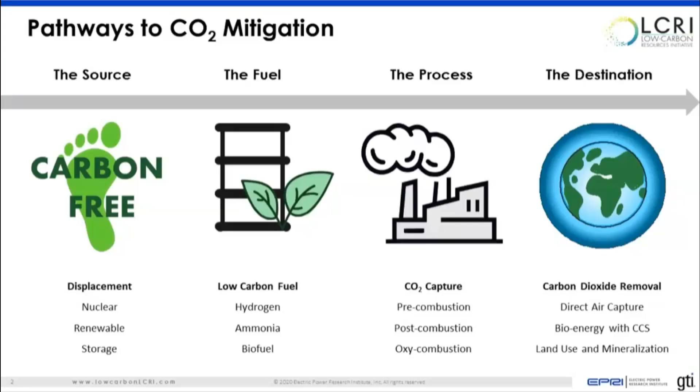So when it comes to decarbonization, we can recognize there are many pathways and potential ways to get there. Everything from the source being carbon-free itself, the primary energy perspective, all the way through removing CO2 from the air as those that are already accumulating, or as we continue to accumulate CO2 emissions through ongoing production of electricity and other activities. And then, of course, everywhere in between, looking at the fuel and looking at ways that we can integrate new processes. I'm going to focus mostly on the fuel aspects and their relevance to both the source and some of the opportunities we might find in deploying carbon dioxide removal technologies.

So when we think about the way of the future of decarbonization for the electric grid, we certainly recognize at EPRI that there is a strong need and a push to continue producing low carbon power generation. So we will continue to rely on a strong nuclear fleet with license extensions and development of new reactor technologies. We will continue to rely on solar and wind assets to produce electricity with battery storage and also energy efficiency standards being applied, and also looking at ways to directly electrify portions of our economy to enable greater and more widespread decarbonization. We're also considering, and there's a lot of research ongoing at EPRI, focused on carbon capture aspects from our fossil-based assets, especially as they help transition into a more decarbonized future.

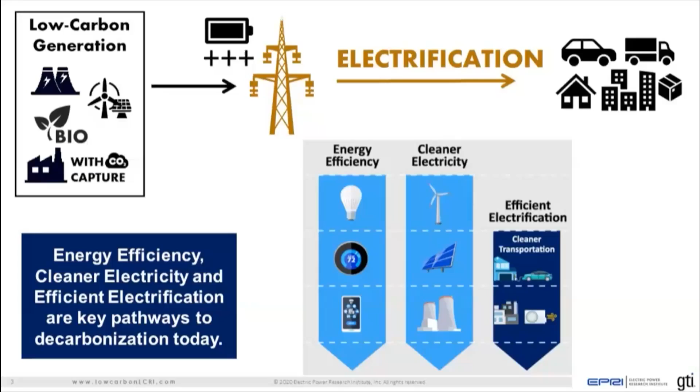So with all of these areas, energy efficiency, cleaner electricity, and efficient electrification, we recognize that we can get to nearly full decarbonization, but it's really considering how do we get that last 10, 20%. And it's not only how do we decarbonize the electricity sector, but we also have to consider other parts of the energy economy that will be challenging to decarbonize.

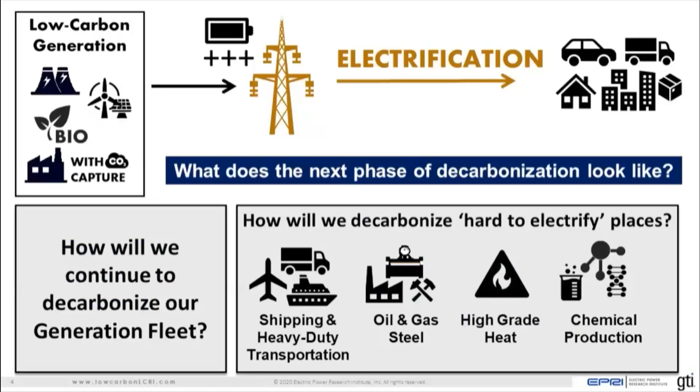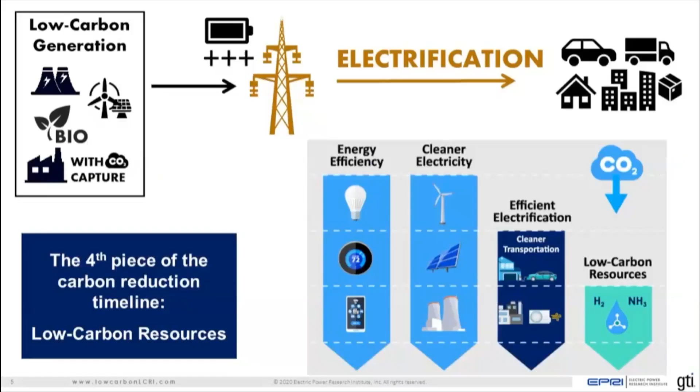And so there we're looking at core aspects of integration, so looking at systems level analysis that help us tie into where the electricity sector is going and where it could contribute to decarbonization through various pathways beyond direct electrification to enable CO2 emissions reduction now and into mid-century. And that fourth piece of the puzzle and the area that we are focused on, we call low carbon resources. So essentially this is that last 10 to 20% of the power generation grid, but then also it spans into the energy economy as a whole.

And then in the 100% cap case, we're showing that the electric sector CO2 emissions are reduced relative to 2005 levels. So what we can find is that there's a lot of assumptions that go into this, and with the shorter duration of this talk, I can't get into all of the details, but there is an EPRI report, of course, for reference. But what we find is that there is, without carbon dioxide removal technologies, a need and a role for hydrogen and probably other low carbon resources in achieving final emissions reduction from the electric system.

Hydrogen production for the electric sector use in this case would be a power to gas to power cycle. And we see that it actually increases based on various policies, especially those that become more restrictive for decarbonization. But we also have to caveat that there are other aspects at play, other technologies which, based on the long horizon, 30 years is quite a long time, a lot can happen between now and then, that we can see technologies such as batteries becoming more of a breakthrough and then would alter some of these scenarios.

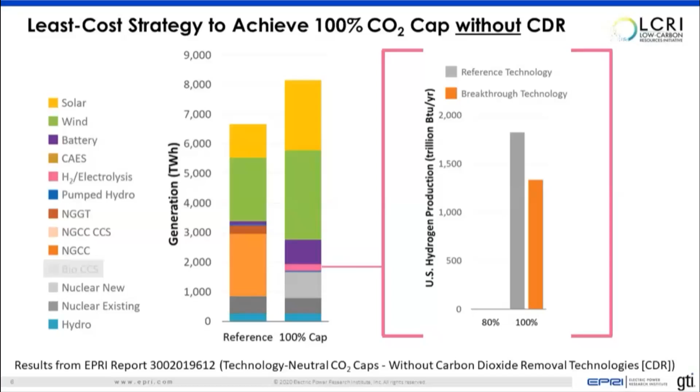So what is the value, what is the purpose of CDR? If we look at pathways that could help achieve the limitations established under 2 degrees C targets, what we find is that there are a number of pathways that get us to global net CO2 emissions relevant to that 2 degrees C target. So here on the graph, we're showing net emissions and establishing a curve, which is essentially the curve we are currently on in the trajectory.

And we've run a number of analyses based on various scenarios. And in some cases, we can find that if we were to curtail emissions directly, this is global across the board, more than just electric power generation in the U.S., so this is the entire economy, we start to see that there is a potential to achieve net zero at a cost, of course, and this is making broad technology assumptions, but there's a pathway to do so.

There's also a pathway that if we continue on the track that we're on, to continue emitting CO2, and then again, the end goal being to limit to the 2 degrees C scenario, then we have to, in that case, begin to bring the curve down. And the way to bring the curve down is essentially to deploy carbon dioxide removal technologies that physically remove CO2 and store it. And in this case, we're looking primarily at bioenergy carbon capture systems, direct air capture, and other similar technologies.

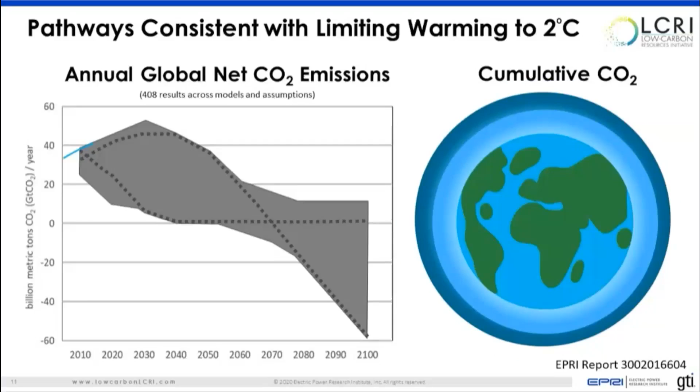So then this paints a picture of an envelope. And of course, within this envelope, there's a myriad of other cases and assumptions. Here we're showing essentially a summary of 408 different model outputs. So the situation obviously isn't very clear, but it helps give us some perspective with which to analyze the situation.

So let's go back and let's look at the same scenario. In this case, we have the 100% cap on CO2, but we incorporate carbon dioxide removal technologies. The graph on the left shows the same figure that was shown before. It's looking at generation with no CDR. On the right, what we see is that we have capacity, and we're showing capacity here mainly for interest in this talk because we looked at generation and our model assumptions.

There is an uptake in generation from a hydrogen perspective, but it's really where capacity for hydrogen stands out the most in terms of differentiating. So the capacity story is just a little bit more interesting. So the graph on the right, 100% CO2 cap scenario, showing both bioenergy with carbon capture and storage and direct air capture, that's the all category, direct air capture only, so no BECCS, and then on the far right of that, no CDR at all.

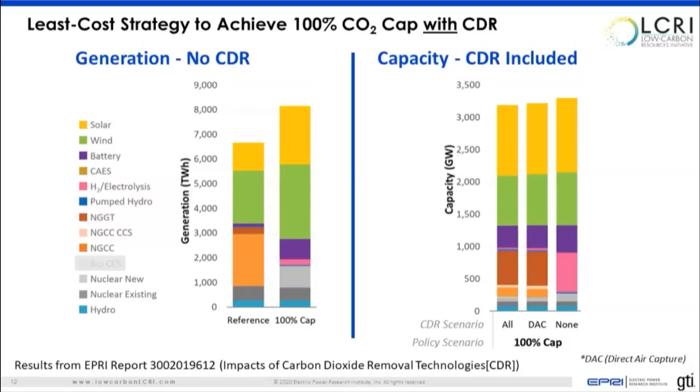And so what we see is that the potential role for hydrogen grows and becomes even more important as we consider removing those final emissions from the system. So that's the electric sector.

And what's really interesting and what we're finding valuable in the context of achieving decarbonization for the electric power industry and for the grid is really that there are other aspects of the economy, other users of energy, other suppliers of energy, such as the natural gas sector, also making very substantial commitments to various CO2 emissions targets by mid-century. And so we're seeing that as primary energy providers and energy suppliers to various end customers and consumers of energy, there also are interconnects that need to be made.

And so if we look beyond the potential for electrification, our estimates are somewhere between 40 and 60% of final energy demand will not be serviced by electrification, or will be hard to decarbonize and hard to electrify or expensive. And so then we have to consider other energy resources, and that's where low carbon fuels and low carbon energy carriers become important. And really it's these interconnections and the potential to integrate around these technologies and these systems which become critical.

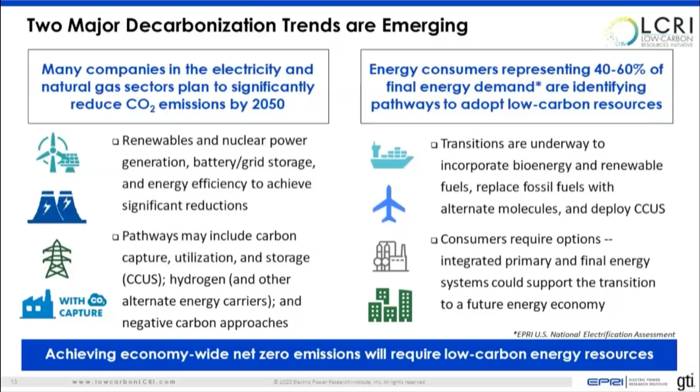And so if we think about from a macro level perspective, where we are moving towards today versus various scenarios which could occur out through 2050. In this scenario, we're calling it transformational. It's essentially showing that there's a 30 to 50% growth in energy due to direct electrification.

And then we're showing the opportunity where there are existing energy consumers in a 2050 scenario, which could be served by low carbon resources. And so we see that there is an important balance to both the final energy side, but then also understanding from a primary energy perspective, where we will achieve decarbonization across that spectrum.

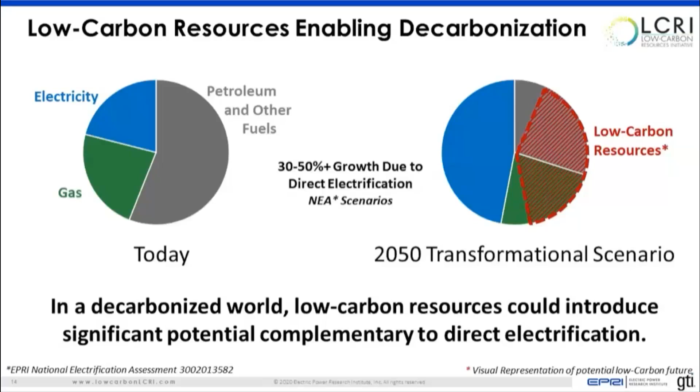And how important it is, when we think about the electricity grid and the role that electricity will play in decarbonization, how the infrastructure, how the support could also enable decarbonization across the economy. And so to do that, we're working on evaluating ways that we can continue syncing and connecting the electricity generation and the energy use, both from a consumption standpoint, but also from an energy production standpoint.

And that's where we're integrating more research and more opportunities to identify ways that we can deploy hydrogen and bioenergy, upgrade and deploy new infrastructure to support these low carbon resources, and then also find new ways to share the value of these resources across the economy.

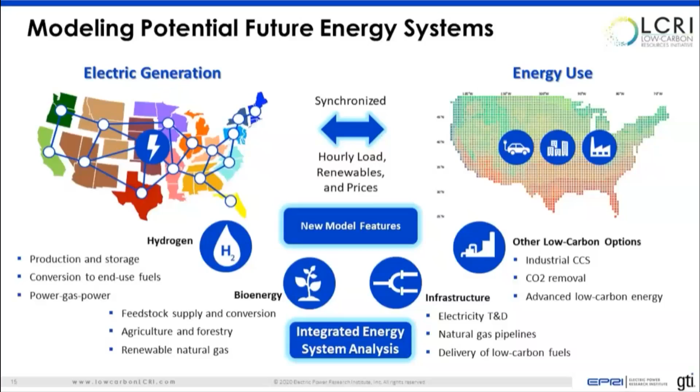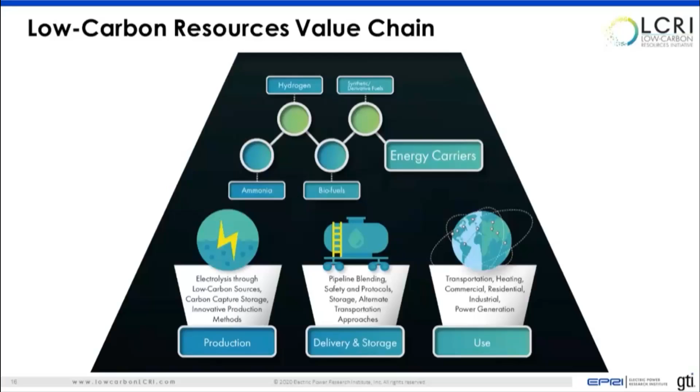So our focus through the Low Carbon Resources Initiative is around the entire value chain for these energy carriers. The next two panelists will be speaking on some very specific aspects of these value chains, but essentially it's how are we going to move, and how are we going to use these low carbon resources, and where do we deploy them in a way that achieves affordable, reliable, resilient, low carbon energy for the future across the economy.

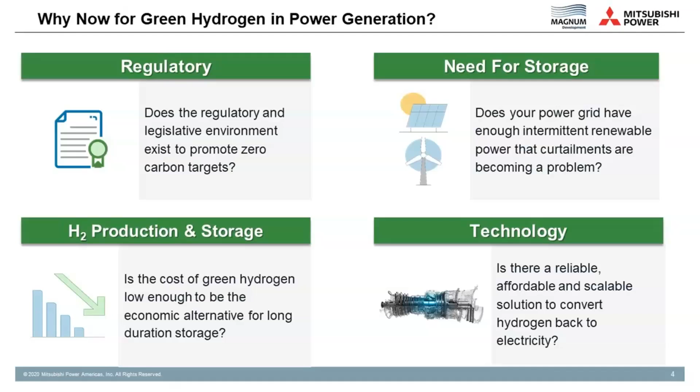And so what we're running into is the more renewables we're adding is actually now just creating more and more curtailments. And so how do you balance that so that I'm not having, really, solar competing against solar? You want solar balanced out over the course of a day and not have it just displacing other solar as we add more to the grid. That's a challenge that's facing us right now.

And so I was long on energy, yet in August of this year, we had our first rolling blackouts in over 2 decades. So what if I could have stored that excess renewable energy in, say, April and brought it into August when we unfortunately were hitting shortages of energy, and could that have otherwise prevented blackouts from occurring? And again, this is just at 30% today.

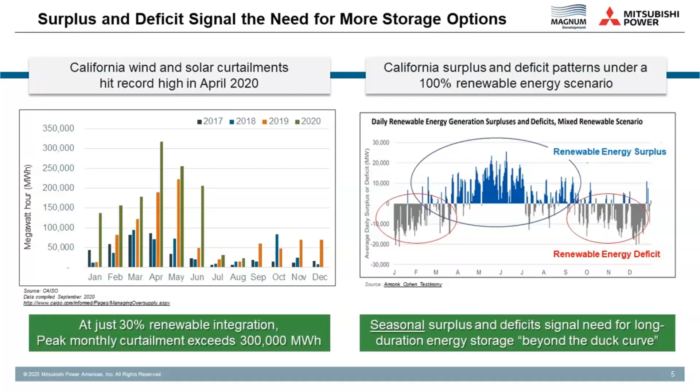That's really what we're trying to solve now, and this is where hydrogen can play a very important role in that regard. So, a lot of people don't think of hydrogen as an energy storage resource, but that is what it is in the power industry. And when we look at green hydrogen, that derived by renewable energy, it's no different than a battery.

And when we look at lithium-ion batteries, you've got a means to control the charging rate of excess renewables to a form of storable energy, we store that in lithium-ion batteries, and then ultimately when the power is needed, we're converting that stored energy to usable electrical via an inverter, in this case, converting DC to AC. A hydrogen energy storage system is exactly the same type of ecosystem.

You've got an electrolyzer technology that really controls your charging rate of excess renewables, converting it to a form of storable energy. We then need a medium to store that energy, and that can be in salt caverns, it can even be in pipelines or above ground pressure vessels. And then when we need that energy, how do you convert that stored chemical energy back to usable electrical? Well, that's where systems like a hydrogen-enabled gas turbine or fuel cells can present that opportunity. So again, no different here than a battery.

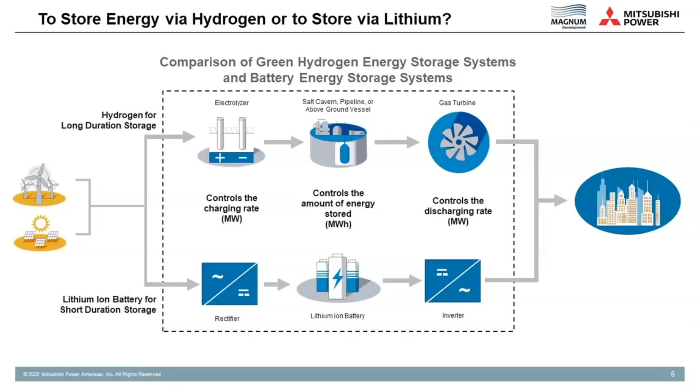And at the end of the day, hydrogen is really much better suited for long-duration energy storage and complements lithium-ion batteries, which are much better geared for short duration. Which gets to the next slide of a study we recently commissioned with E3 Consulting, and they looked at what are the opportunities for hydrogen in a low-carbon future in the West.

And really, the two most important things we were able to draw from the study from E3 was, like I just started talking about before, lithium-ion batteries are really ideal for your short duration, 4-hour, 6-hour, maybe up to 8-hour type of discharges, whereas hydrogen is going to be ideal for your much longer durations, getting into the 12, 14 plus hours, and as we add more and more renewables, we're seeing the need for those longer duration types of challenges.

And so, again, going back to the slide in California, if I want to shift April excess into August shortage, well, lithium-ion batteries are not well suited to be able to store that because they've got auxiliary loads to keep the systems energized. They have, even, self-discharge. Whereas hydrogen, you're effectively bottling it up, and whenever you need it, and given the vast uses for it, it's not facing the same type of round-trip efficiency impacts over that longer-term types of use.

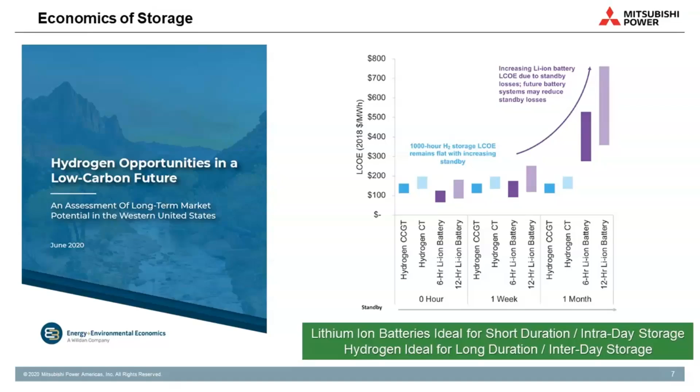So again, we're not here, though, to try to pit that it's batteries versus hydrogen, quite different. They're really solving two different use cases, and both use cases are absolutely paramount if we're going to reliably and affordably try to integrate more and more renewables and help meet our decarbonization goals.

So that really draws to the last signpost I talked about: what are the ways we're doing today to really cost effectively convert hydrogen back to usable electricity? And the Intermountain Power Project is really the world's first project geared at doing just that. So just this past year, we were awarded by the Intermountain Power Agency for our hydrogen-capable gas turbines. This power plant is actually an existing coal-fired power plant that will be retired and decommissioned by 2025.

And in 2025, we will have gas turbine combined cycles that will be operating initially on a blend of 30% green hydrogen, 70% natural gas. And by 2045, we'll be 100% green hydrogen combined cycle operation.

And then the last one, and I'll probably stop here on this slide, I wanted to talk about is our Advanced Clean Energy Storage Project, which is actually just adjacent to the Intermountain Power Project. But here, this is our project where we partner with Magnum Development, seeking to really create a hydrogen hub in Delta, Utah, to support the West's effort to decarbonize.

And this site here, one of our salt caverns, can store upwards of 150,000 megawatt hours worth of renewable energy. And that's really what we see as the great opportunity here in the West to help achieve, again, its larger scale efforts to decarbonize.

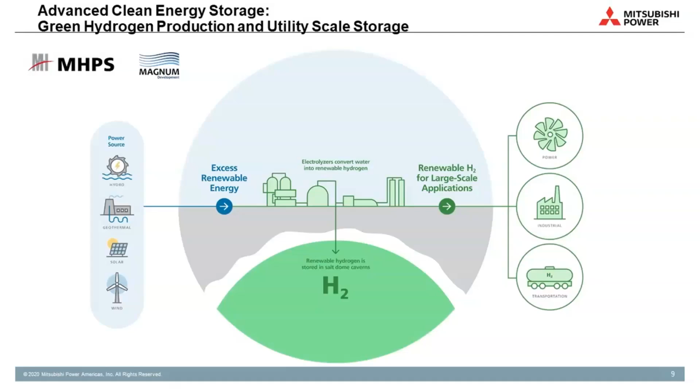So as Eric said at the beginning, my name is Sikander Mahmood, and I am the project manager in the Future of Gas team within Cadent. So just to give you an overview of the presentation today: I'll quickly run through the strategy of the gas industry in the UK and how that links into the projects, which I want to go into a bit deeper, which is HyDeploy, looking at blending hydrogen in the natural gas system, and how that fits into the wider picture of a project which we're badging HyNet, and then hopefully take some questions at the end.

Yeah, as Eric stated at the start of the conference, Cadent is the largest gas distribution network in the UK. We have over 80,000 miles of pipeline, and we also run the dedicated emergency gas line for all the UK distribution networks.

So to achieve the target of net zero by 2050, there's a lot of work to do, and the gas industry in the UK has already made some significant strides towards this via the use of biomethane and projects such as BioSNG, which look at converting black bag waste into gas. And then there's the hydrogen blending work that's going on across the world, and that's what I really want to focus on today.

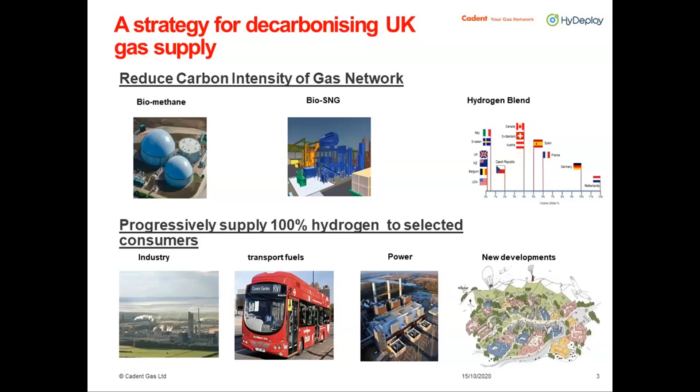And blending hydrogen is there to lead us to progressively start to supply closer to 100% hydrogen to selected consumers, such as heavy industry users, transport fuels, power generation, and new developments.

So what is HyDeploy? It's a project which is funded by the Innovation Programme in the UK. It's led by Cadent as the lead gas distribution network, and we're partnered with Northern Gas Networks, who are the other GDN. We're also working with Keele University, who are the host site, the Health and Safety Executive Science Division, who are providing us with the evidence that we need to go forward, ITM Power, who provide us with the electrolyzer, and Progressive Energy, who are covering the overall project management.

So the objective of HyDeploy is to essentially demonstrate that we can blend up to 20% volume of hydrogen within the current gas infrastructure that we have in the UK, and that it can be distributed safely and efficiently with minimal disruption to consumers. And there's a chance to have a saving of around 120 million tonnes of CO2 cumulatively by 2050.

And why blend and not jump straight to 100%? Blending allows us to start to hit that decarbonisation milestone with minimal change to the consumers. So the consumers would not need to change the appliances in their homes. The assets that we have in the networks can remain the same, and so there would be minimal disruption. And we can start to really build on that hydrogen supply chain whilst we work towards progressively supplying 100% hydrogen.

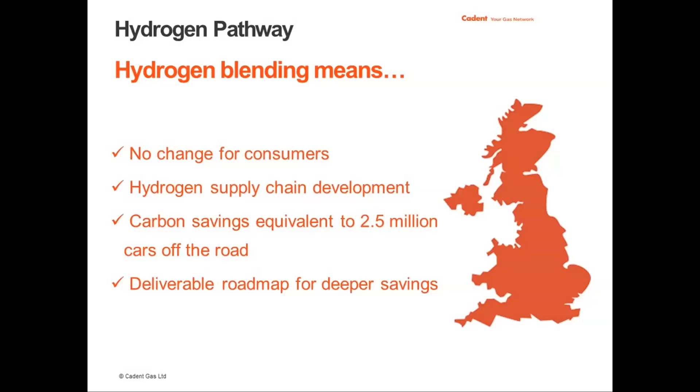And it really gives us a chance to reduce the carbon emissions in the meantime, and it's a great stepping stone. And we've used this figure here: it's like taking around 2.5 million cars off the road if we were to blend across the UK.

So just to give you an idea of the project timeline itself, we started working on the safety case for the first demonstration project at Keele University in 2017. We are still blending at Keele University. Due to COVID-19, we had a short break. However, we have extended the demonstration, which we hope to finalise in March 2021.

And in the meantime, we've been developing the evidence for the safety case for the second public demonstration of hydrogen blending, which will be in the northeast of England in a village called Winlaton. And we're hoping in the next few months we should be on site and ready to blend. And once that's up and running, we will start to develop the safety case for the final demonstration, which is part of the HyDeploy 2 programme, which will be a public demonstration in the northwest of England, and that will hopefully eventually lead us to roll out hydrogen blending across the UK.

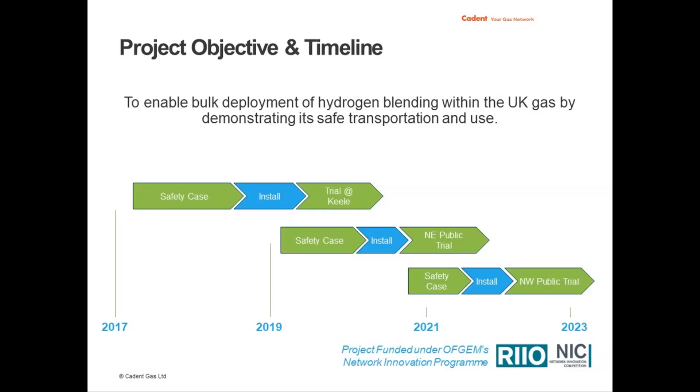So Keele University is a perfect location to have a first-of-its-kind trial. It's really like a small town on gas. There's around 100 residential properties that we're testing on, a few multi-residential buildings and some office blocks and commercial buildings. And it's been really good to work with Keele because, in essence, you're working with a private gas distribution network and having to deal with one party rather than multiple parties. And really, it's like a living laboratory.

So I spoke about the safety case, but what does building the safety case actually mean? There's a lot of work that goes into gathering the evidence. The current UK Gas Safety Management Regulations state that you can only have 0.1% hydrogen in the gas networks. So to be able to blend into these trial areas, we need to achieve an exemption to those GSMR regulations, which will allow us to have up to 20%. And to do that, we need to build a safety case of evidence.

So we've been conducting some research on the appliances that we have on the networks, the boilers, the gas fires, etc., and doing laboratory tests on blended gas and natural gas. The same goes for the materials that we have on the Keele network and the northeast, reviewing those pipelines and the assets that we're going to put the blend through, and doing some tests in the laboratories.

We're also looking at the gas characteristics. So how does gas accumulate in a building, and how does that differ for blended gas? And what are the consequences of that if it was to ignite? And then there's the operational side, so looking at the gas detection equipment that we use currently, and how will that work with blended gas, and also the operational procedures that we have for emergency response. And then finally, and quite importantly, is the customer perception piece.

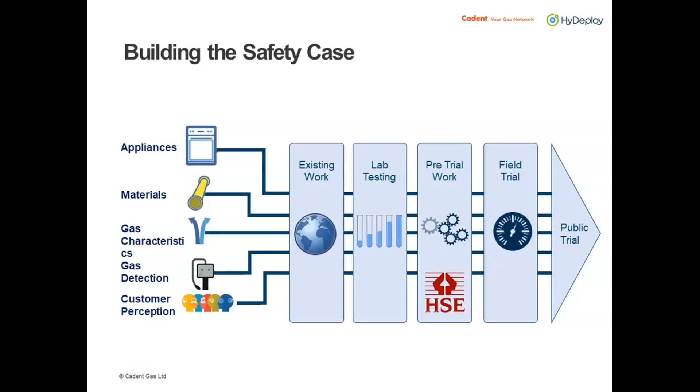So HyDeploy is the first time we've had blended gas in a network in the UK, so we've been able to gather some real evidence on the customer perception side, working closely with the customers at Keele and in the Northeast. And all that leads us to gathering that pre-trial work evidence to achieve that exemption. So following an exemption, we then start the installation phase on site.

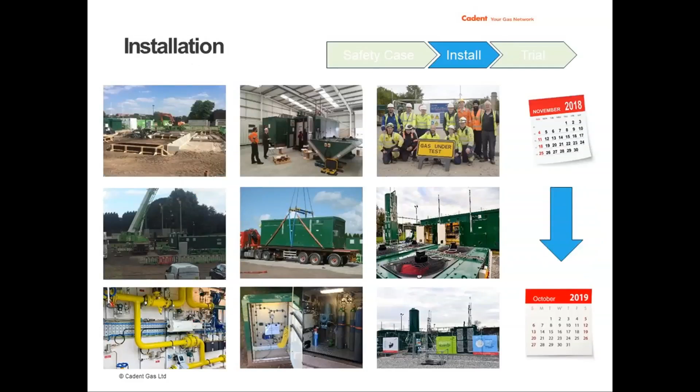A few of these pictures show the equipment that we're installing on site at Keele University and some testing that we did beforehand. On the next slide, I'll go through the setup on site. So we have a medium pressure gas pipe running from the gas network into this compound, which you can see on here. So where it says natural gas inlet, that's coming in to what's labelled as the hydrogen grid entry unit. We're producing the hydrogen on site via the electrolyzer using electrolysis, so splitting water into hydrogen and oxygen.

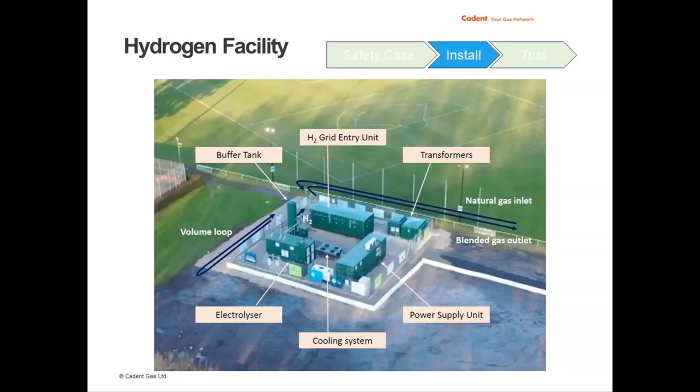The hydrogen is then stored in what you can see labelled as the buffer tank, and then injected into the hydrogen grid entry unit where it mixes with the methane. That then goes around the volume loop to ensure that the gas quality is of the right standard and the right specification, and then that's going through the blended gas outlet into the local pressure reduction station that we have to bring it down to low pressure in the network. And that's essentially the layout of the compound.

In terms of where we're at now, it's fully built. As I said, we are running on site at Keele University now. We did have a short delay due to COVID-19. However, we have extended the trial until March 2021 to give us that extension to allow us to gather a little more evidence on blended gas.

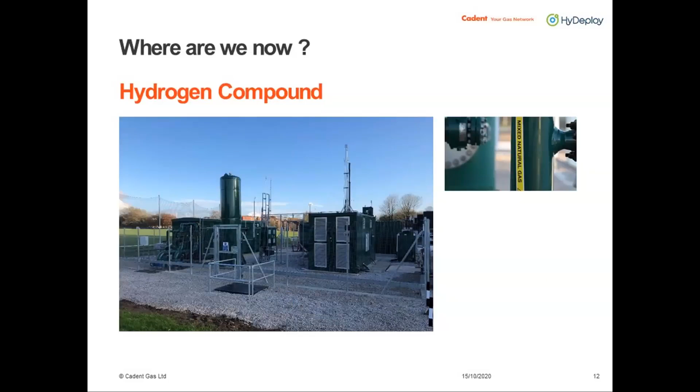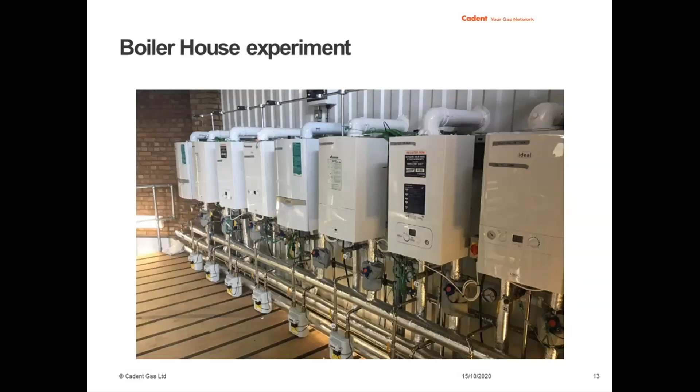Simultaneously to the work that we're doing in the domestic properties and the commercial properties, we are running a boiler house experiment on site. So we have 8 boilers installed, and 4 are running on blended gas, 4 on natural gas. They will then be compared at the end of the trial, and we have them running on longer cycles to give us years worth of data. We'll then send the boilers back to the manufacturers and really ask them which one did you think was running on blended gas and which one was on natural gas. And then allow them to dig into the details and the components to see if there was any long life impact.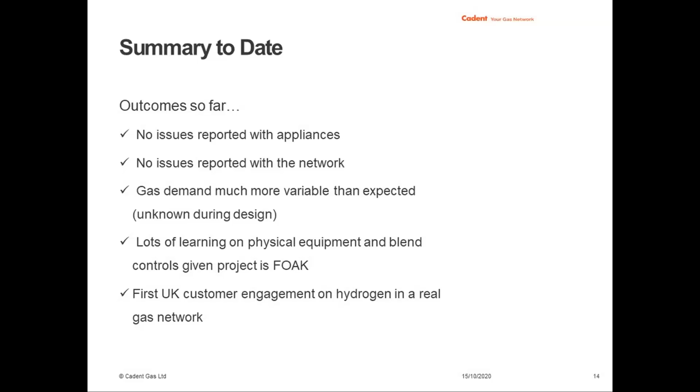So in terms of summary to date on site, there haven't been any issues reported with the appliances that we have in the homes. There haven't been any issues reported on the network, other than the usual business as usual gas emergency reports. In terms of the gas demand on site, that has been more variable than expected, which we didn't know in the beginning, but we have been doing some work on that. And you can imagine it's a first of a kind project, so you are going to have these issues and things that you need to resolve. And like I said, it's the first time the UK have managed to engage with regards to hydrogen on a real gas network, so it's provided us with some great learning going forward.

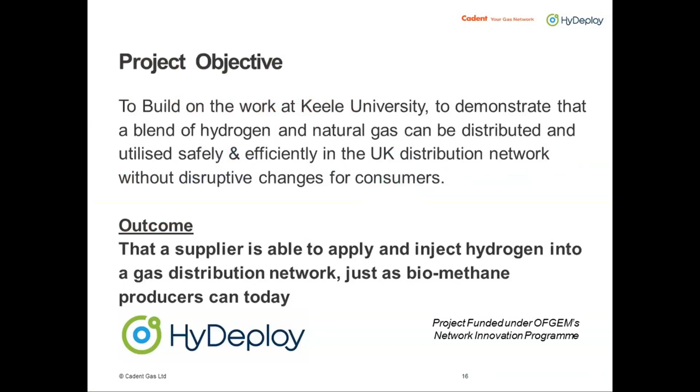So that leads me nicely onto HyDeploy 2, which is the public demonstrations. So I mentioned at the start the Northeast demonstration and the Northwest, and those are encompassed within HyDeploy 2. It's the same project consortium so that we're able to carry on with the learning, and the objective is very much the same. However, the outcome is that following HyDeploy 2, we should be in a position for UK rollout of blended gas. So a supplier is able to apply and inject hydrogen into the gas distribution system, just as biomethane producers can.

So in terms of the trial principles themselves, at Keele University, we aim to do 100% gas safe checks on the properties and also do some bottle testing. So putting bottled mixtures of hydrogen and natural gas into each property and each appliance. However, that's not a feasible position for UK-wide rollout. Therefore, on the first public trial, we have aimed to do, again, 100% gas safe checks. However, we've limited the bottle testing. We've gone to no bottle testing. And then in the second public trial in the Northwest, we will do a limited amount of gas safe checks and 0 bottle testing to allow us to slowly reduce the mitigation, because it wouldn't be feasible to go into millions of properties and check each appliance.

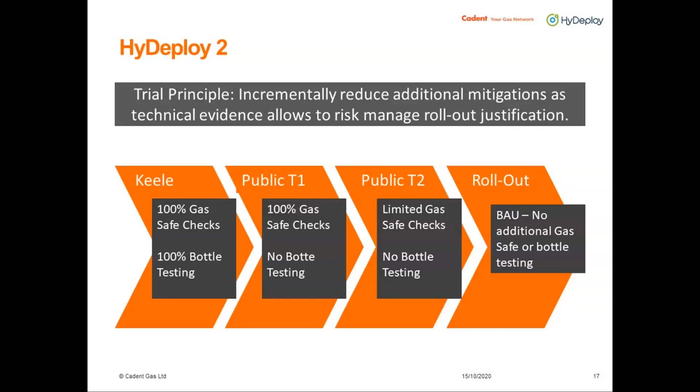So just to give you an overview of the location in the Northeast, we are injecting into Winlaton, which has around 670 properties.

The arrow that you can see on the bottom is where the compound will be placed. And there will be a medium pressure line going into the network and blending into that isolated network.

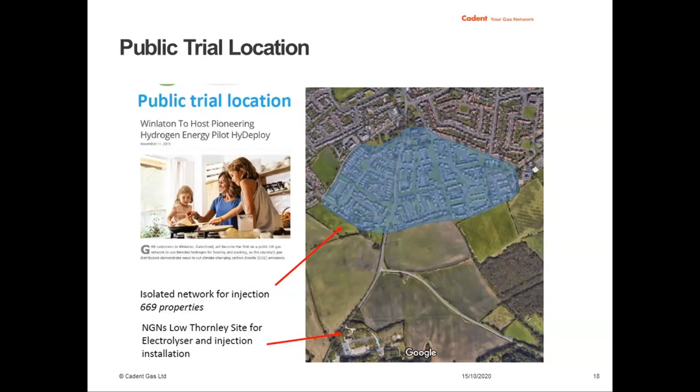So the current status of the overall project: the exemption for the Northeast project is under review by the Health and Safety Executive in the UK. Once we get the exemption approved, that's when we will be able to start the live trial in the Northeast. The compound is currently in the design and install stage, which will be ready in the next few months.

And we are really embodying the learning that we've got from Keele University and from the evidence that we've been gathering going forward, and working towards closing those evidence gaps.

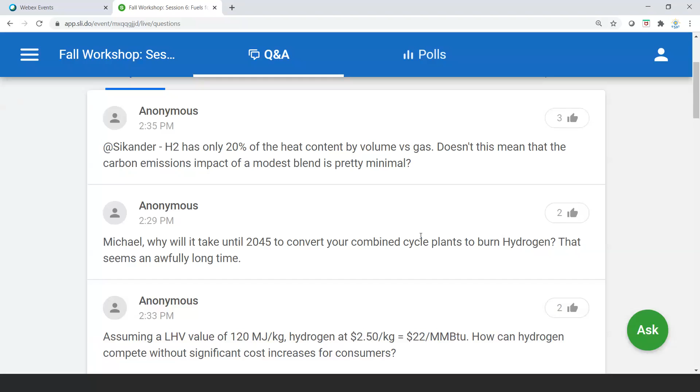Yeah, absolutely. I can give that a go. In terms of the work that we're doing with HyDeploy, we are only looking at a blend of up to 20% hydrogen, and from the evidence and the research that we've been doing, we have seen minimal impact in comparison to natural gas.

As you do increase the hydrogen percentage past 20%, yes, you will start to see some changes in the flame picture, in the heat profile, and the operation of the current appliances that we have on the networks, which is why we have put 20% as a hard stop. If you were to blend over that, you would need to start to replace the assets that you have in the networks, and therefore 20% is a great position to be in whilst we start to work towards the 100% goal of hydrogen.

Do you have any comments on the emissions impact? I guess this question here at the top: hydrogen only has 20% of the heat content by volume versus gas. Does that mean blending?

Yeah, absolutely. We appreciate it's not going to tackle net zero straight away, and it's a stepping stone to decarbonize. As I said in the beginning, if you were to blend hydrogen into the network across the UK, it'd be like taking 2.5 million cars off the road. So there is still a chance to have a significant impact on decarbonisation. As you can imagine, adding hydrogen into the gas mixture would also reduce the carbon monoxide content, reducing the risk of CO fatalities.

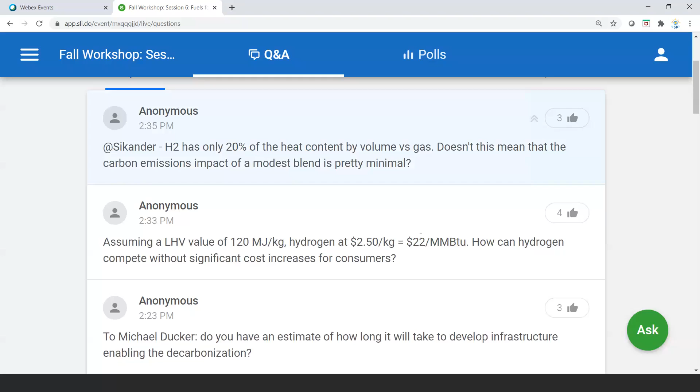Great, thanks, guys. So I want to call out Mike, because there were some other questions. They're not at the very top here, but they're kind of related to this idea of blending. And I think specifically there were some questions on the turbines and the gas turbines and the modifications that are needed to make those compatible. And so, Mike, I don't know if you could maybe just talk to that point a little bit more. I'm trying to remember some of the questions. Yeah, just I guess the timeline that's required. I think you gave 2045 as kind of the end point. Why are you estimating that it'll take so long to get to that point?

It's a great question. And to be clear, that's what the regulatory requirements are for that specific project. We will have 100% capability by 2025. So this is not something that we're waiting 20 plus years to pursue. The regulatory requirement is 2045. Again, I go back to this concept of hydrogen as an energy storage resource.

And the fact of the matter is, today, if I had a 100% hydrogen-capable gas turbine, that's a gigawatt. That's basically a gigawatt-sized battery. There are no gigawatt lithium-ion batteries. The entire installed base of lithium-ion batteries in the United States is about a gigawatt and gigawatt hour. So one power plant running 100% would be the entire United States equivalent of batteries.

So let's keep that in context when we think about green hydrogen, and people see, oh, it's only 30%, or why are we doing this? It's exactly what Jeffrey was talking about. It's a transition. And so what do we need in 2025? 30% will be one of the largest effectively energy storage systems in the entire U.S. for that power plant, just running on a 30% blend of hydrogen.

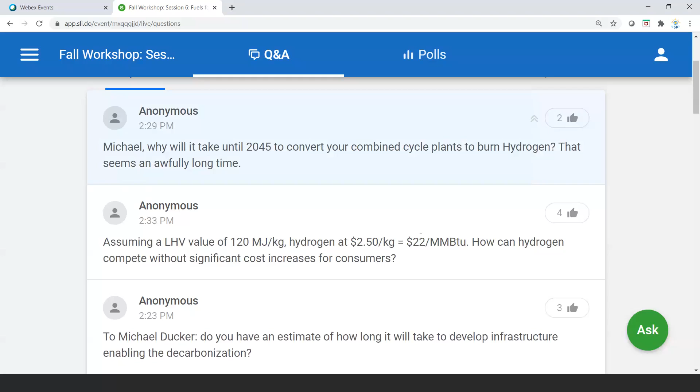And again, one of the best attributes of the gas turbine is we can effectively, over time, as more and more renewables come on, we see more and more curtailments and more need to add hydrogen. We're just effectively increasing the amount of hydrogen content in that unit. We're not adding a bunch of new batteries. We're not adding a bunch of new infrastructure.

It's really making use as cost effectively as it can to transition that unit to a fully decarbonized unit over time. And in the West, maybe that occurs much quicker and at a rapid pace, where you hit 100% hydrogen needs at an earlier date than other parts of the U.S. potentially. But nevertheless, that's what we're really positioning these units for.

Hey, Bethany, can I just ask a follow-on question to that, to all the panelists? I think it's really important that we're looking at this now, because not only are there combustion differences in burning hydrogen or blends of hydrogen, there's also the foundational materials compatibility of the entire infrastructure, whether it's turbines or pipelines or anything. Well, I know there's a lot of work going on in this area at the department. I was wondering if the panelists could comment on how they see that aligning with the future plans in terms of solving all of the challenges in those areas.

I can address, foremost, our IPP project with Intermountain Power Agency. Keep in mind, we have guaranteed the operation on hydrogen. So how we're installing the infrastructure, what we're doing up front, is making sure that over time it can convert to 100% hydrogen. So what does that mean? Physically, what's changing? We've got some bigger enclosures. We've got some bigger pipes and some bigger valves. We've got additional fuel flow meters.

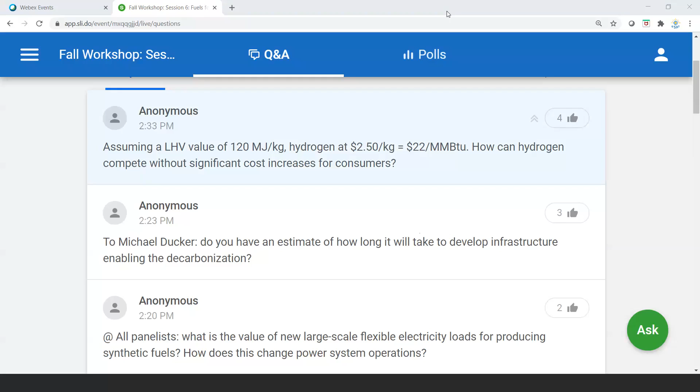And it really is a challenge I think grid operators and long-term resource planners are trying to get their head around: how do I value short duration batteries, medium duration batteries, long duration batteries. But that is what we need to solve that question, and the most cost effective way to integrate. And all that gets back to, again, what are you trying to solve here? Well, it's carbon free generation that is being targeted within these grids.

So, just to quickly add to that, Bethany, we know that the road to decarbonisation is going to cost more money, but it's about evaluating the options that we have. Cadent has around 11 million customers, and the user base is diverse, and the transport and heat industry is really complex. So it's about providing those options and the availability for public choice. And the route to decarbonisation can be simpler if we're going through blended gas and eventually through 100% hydrogen.

And there's aspects such as what Michael alluded to in terms of seasonal demand, and we've had seasons here in the UK where you have the beast from the east, where you've had snowfall for large periods of time where people want to flick on their heating and have it work straight away. So those sort of occasions is where hydrogen really comes into play, and long-haul transport and heavy industry users such as glass manufacturers. And it's really key to understand that diverse user base.

And Bethany, can I follow up on that as well? Yeah. Okay. Thanks all for giving such a clear description of our H2 at Scale initiative. It's really exciting to hear.

But what I will add, I think Jeffrey mentioned in his presentation, he used the terminology make, move, and use, and I think it's important to realize that there's a combination and cost trade-offs amongst that, and it depends on the end use. If you're doing it for storage or for large-scale energy transport, all of these things should also be taken into account. Maybe everyone could comment a little bit.

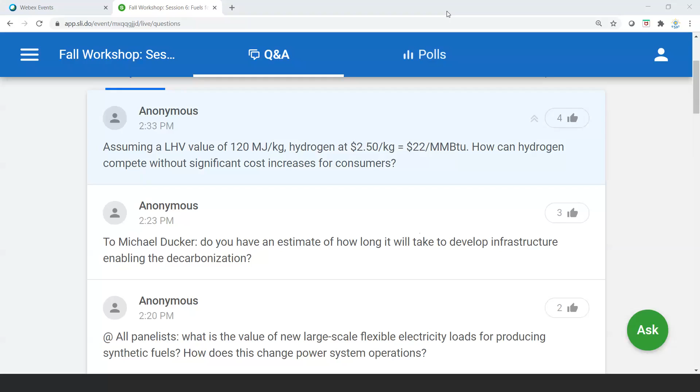I can say it's definitely in our portfolio to be analyzed further. We're working very closely with a lot of major players in the energy space, not directly tied to electric and gas utilities, because as was mentioned before, there is a significant portion of the energy economy which will rely on alternatives to electricity as a clean energy source. And understanding the value that they place on fuels or energy carriers and the options they wish to maintain in terms of availability and reliability will derive much more important insight than simply looking at efficiency.

So we certainly recognize that power to gas to power from an efficiency standpoint doesn't look very good. But when we think about all of the other value components to such a scenario, as Mike has pointed out and Sikander has pointed out from a grid perspective, it's more complicated than what we see on the surface. And so we have to take into account the full aspect of economy-wide decarbonization. That's really our focus.

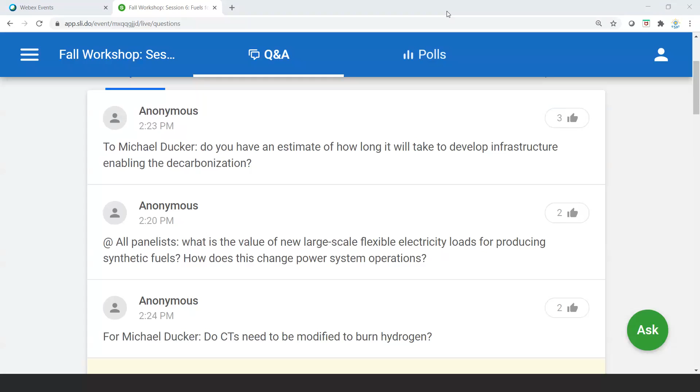Just to touch on your first point then, Bethany, with regards to transport, we do understand that as hydrogen develops further, there will be more vehicles, trains, buses, trucks, etc., that will be ready for hydrogen. And it's important that we as a gas network are ready for that change also. So in Cadent, we do have a portfolio of projects with regards to transport, looking into how hydrogen will be feasible for trains.

We've got projects with the National Physical Laboratory assessing if we are able to extract hydrogen from the gas distribution networks. Is it pure enough to be used with fuel cells? And we've got various projects looking at the impact of hydrogen on CNG trucks. It's about gathering that evidence base to really understand that we're able to support the upcoming demand that we will potentially have.

What I'd add to that question is, one of the great opportunities here is when we look at even just running on partial fractions of hydrogen in the gas turbine, we're talking upwards of 100 tons per day of demand at the lower percentages I talked about. Whereas for vehicle infrastructure, some of the fueling stations they talked about are maybe a couple tons per day.

So the benefit here is the power industry really can represent that opportunity to get scale, more centralized infrastructure. And as we look at other industries like heavy haul transport, how do they start decarbonizing and utilizing hydrogen? Being much smaller demands, they can effectively piggyback off of the scaling and cost downs that we're going to achieve in the power industry. So what's really exciting is that the scale of what we're doing in power really transcends the opportunity beyond just decarbonizing power. It really is going to help leverage many of these other industries as well.

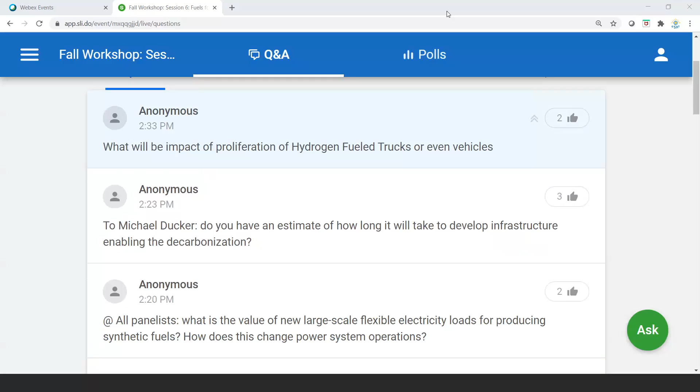Thanks, Bethany. And thanks to all. I'd like to thank our panelists for their great presentations and the discussion today, and thank all of you for your participation. This has provided a really good update on the global outlook for the future role of hydrogen, and I hope it has provided some stimulating thoughts for everyone.